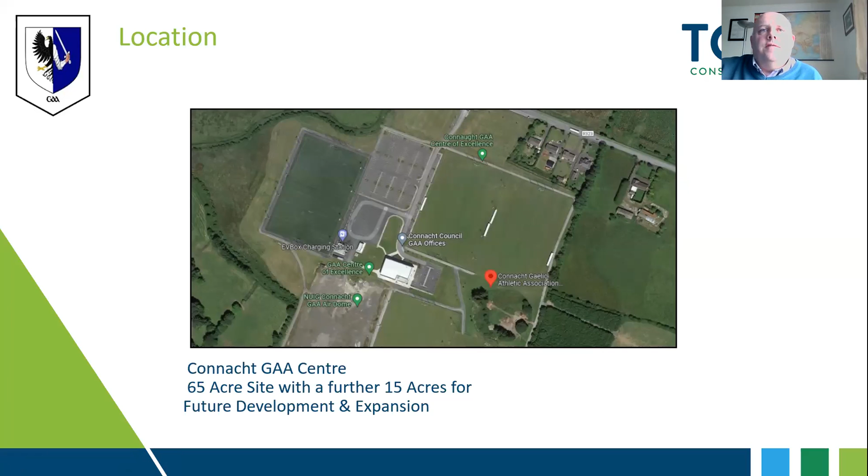This slide shows the existing facilities at the Connacht GAA Centre of Excellence. The centre was developed in 3 phases. The first phase was the external playing pitches, which included 6 playing pitches, where 1 was 3G and the other 5 were natural sand.

The second phase of construction was the pavilion building. The third and last phase was the internal training facility, i.e. the dome, which was recently completed in 2020 and opened in 2021.

The Connacht GAA Centre originally opened its pitches in January 2012. The pavilion building followed, being opened in December 2012, and the dome facility opened in December 2021.

The centre is the home of Connacht GAA headquarters. As I said, it has one 3G outdoor synthetic playing pitch and 5 all-weather sand-top playing pitches, 3 of which have floodlights capable of being played at night. The pavilion building includes dressing rooms, a gym, a commercial-scale kitchen, the Connacht offices, a lecture facility, conference facilities, and around the perimeter of the facility there's a perimeter walking track of approximately 2 kilometres.

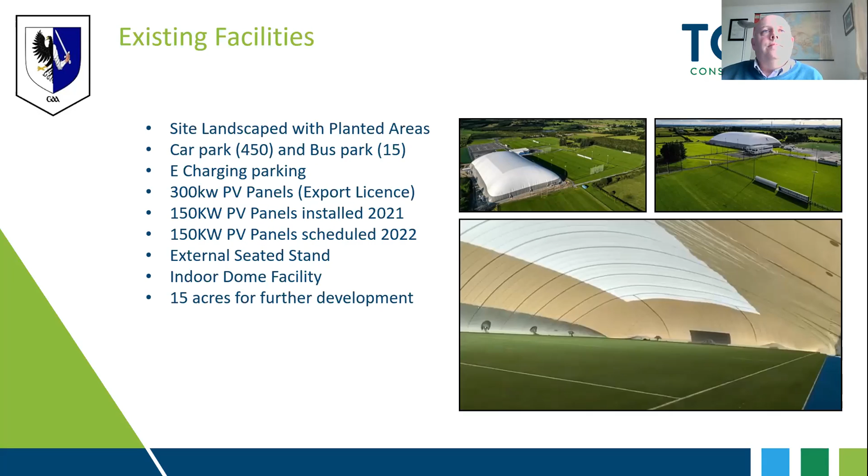So Tobin Consulting Engineers, what was their involvement? Tobin Consulting Engineers was project managers and client reps for the project. We were the civil and structural engineers on site. We did the quantity surveying in relation to planning and statutory requirements. We dealt with the planning applications, the fire cert applications for the clubhouse and the dome, the DAC for the clubhouse and the dome. We controlled and managed the BCAR commencement and completion notices for all the various permissions.

Tobin's project scope for the facility included the initial feasibility, the site selection in relation to the selection of the site, the preliminary design through the planning process. We went on to do the detailed design, and then the project was tendered through the tender process, construction, and ultimately the handover to the client, Connacht GAA.

So now I'll just go into a bit more detail in relation to the NUI Galway Connacht GAA dome. The dome itself measures 150 meters by 100 meters, 150 in length, 100 wide, with a height of 26 meters at the highest point.

It's a double skin fabric structure, and there's approximately 200 mil between the two skins, the inner skin and the outer skin. The dome is fixed to a perimeter ground beam. It's an inverted T, and I'll show you pictures of that later on in the show.

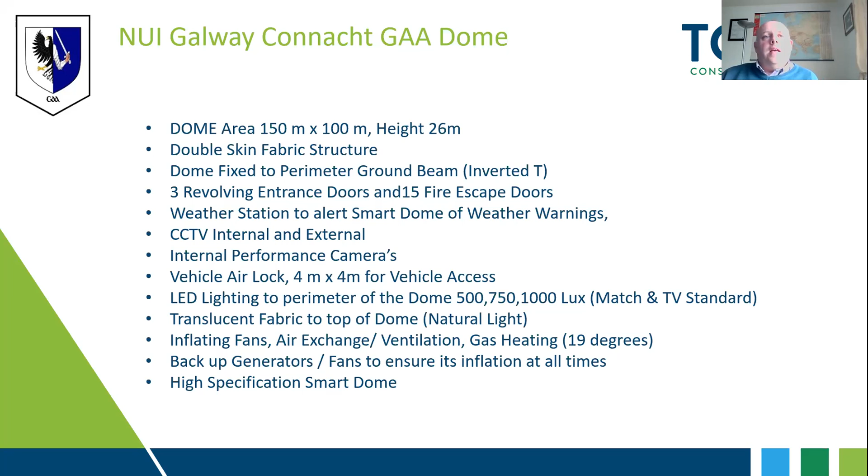As part of the dome, you have the inflating fans, you have an air exchange ventilation system, you have gas heating, which heats the dome up to a temperature of 19 degrees. You have backup generators and fans to ensure the dome is inflated at all times. Therefore, it's a high specification smart dome.

Within the dome itself, it has the following facilities. You have a 4G pitch measuring 130 meters by 80 meters - that's the playing surface. The height above the pitch is 16 meters on the sidelines and 26 meters at the center. The dome curves from its highest point of 26 meters down to virtually a half meter around the perimeter, but it's 16 meters over the playing surface.

The dome itself can accommodate football and hurling. It has a running track training area to one side, measuring 130 meters long and 10 meters, all lined out as part of the synthetic installation - you'll see pictures of that later. You have a gym area at one end of the dome, measuring 40 meters by 5 meters, with a capacity to hold 30 people at any one time.

As mentioned before, you have the performance testing all installed within the dome. You have portable stands internally, currently capable of seating 600 people, and the intention is to increase the number of these mobile stands into the future.

Around the perimeter of the playing surface, you have a 2G surface - you'll see in the pictures later, it's a blue surface. This is the concourse perimeter, so this is whereby people can easily walk. It's a flatter, smoother surface, 2G surface. The dome has a capacity of 5,000 up to 10,000. Our fire cert secured for the site from Mayo County Council allows 10,000 occupancy.

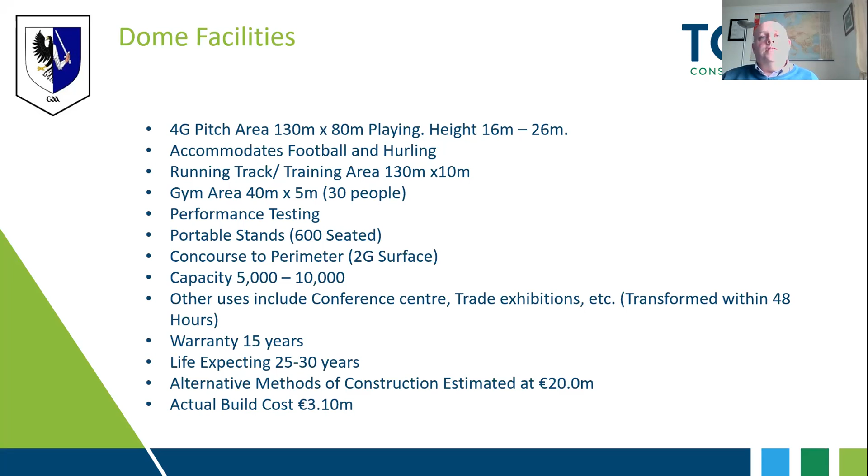Now we move on to the dome program. We secured planning permission for the dome itself back in 2017. We secured funding in 2018, which helped us progress to detailed design, started in January 2019. We went on to tender stage July 2019, and commenced work on site October 2019.

It's normally a 7-month contract, but due to COVID, delay in delivering materials and site closing, it took quite a bit longer. The work was complete in October 2020, which was 12 months - not a big increase considering the obstacles we had to go through.

The dome itself was officially opened in December 2021 by President of the GAA, Larry McCarthy, and the first indoor competition game was played on it, the FBD League, in January 2022, Leitrim versus Sligo.

In relation to the dome team that was involved, the client itself was Connacht GAA. Project managers was Tobin Consulting Engineers. The main contractor that won the contract for the dome was Prunty Contracts Limited. The dome specialist under Prunty Contracts was DBS, Salvini and Company, and the pitch specialist, a Sligo-based firm, SIS.

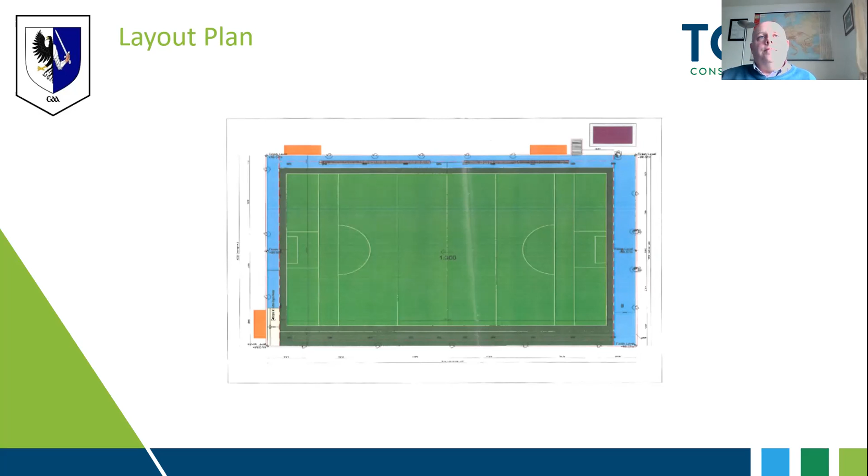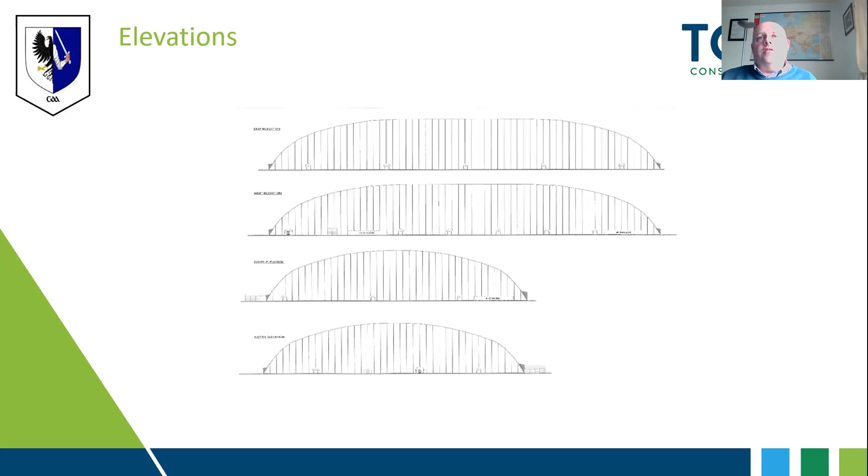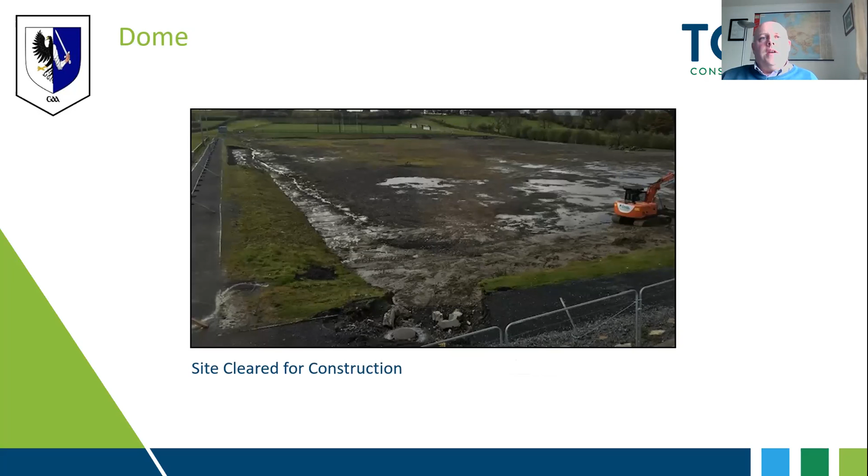There's a few snaps here now in relation to the construction. This is the first site when we started on site. The weather was quite bad back in October 2019, so this was just the site being cleared for construction.

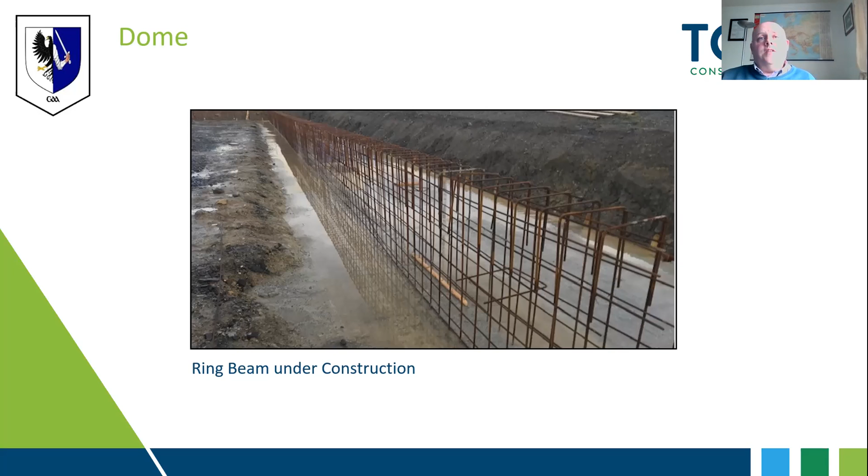I've mentioned before that there was a perimeter beam around the dome, whereby the dome itself is fixed down to this beam. This is the inverted T beam, which runs right around the dome, its overall length being 0.5 kilometer, 500 meters, all 4 sides of the dome. That base is approximately 4 meters wide, 0.5 meter thick, and the upstand is approximately 2 meters high, 0.5 meter wide, and that upstand projects above the ground by approximately 0.5 meter. I'll explain on the next slide the reason for this.

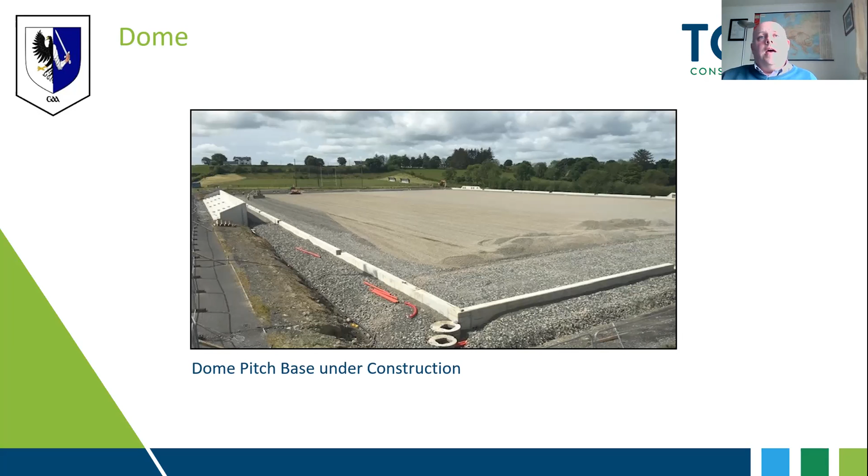This is the dome pitch base under construction. The final layer of screenings has been laid, and they're getting ready for the carpet to be installed. Around the dome, outside the T-beam, there is a 4 meter pathway, which allows access around the dome for maintenance during its lifetime.

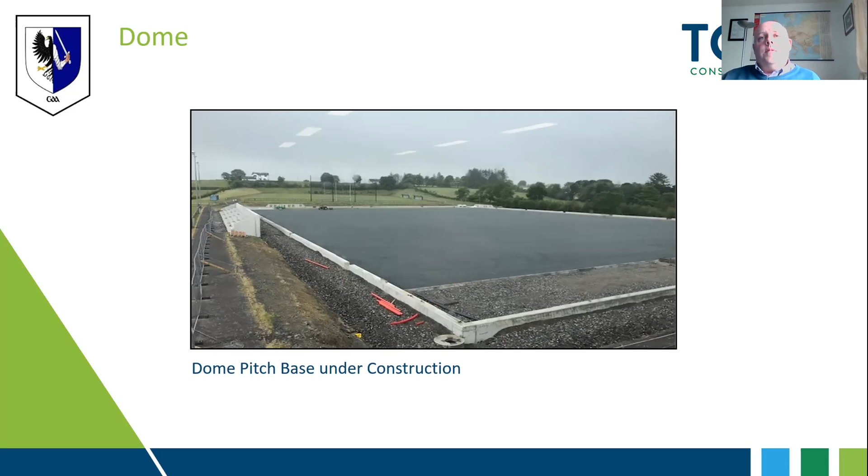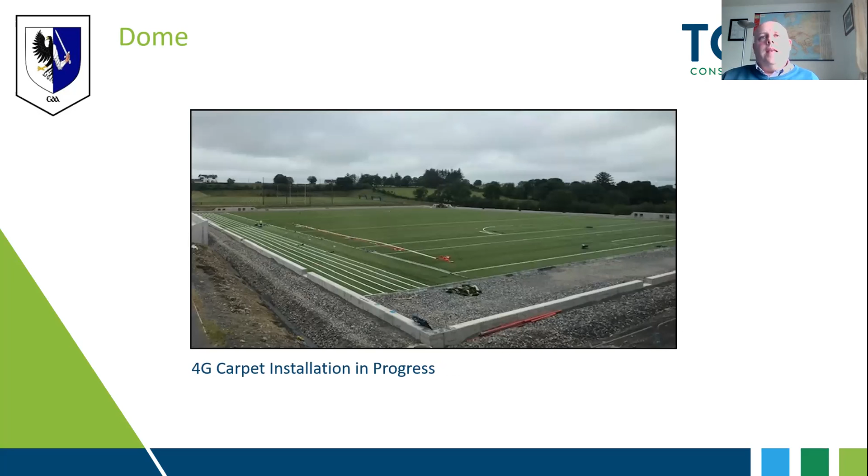In this slide, the 4G carpet installation is in progress. You can see the running track to the left-hand side, with the lines laid out, and the pitch itself. It's a carpet with a 60 mil pile, and it comes with all the lines in place. It comes in rolls, which are laid out, lined up, and stitched on site.

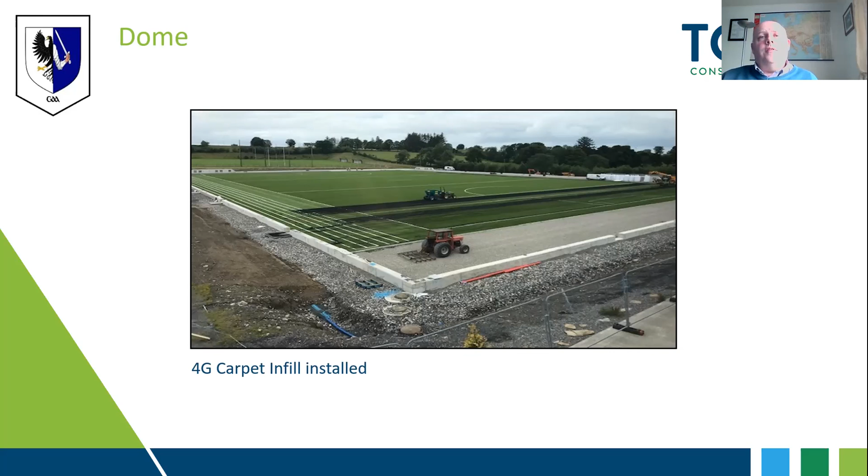As I said, there's a 60 mil pile in the carpet, and into that pile you have to install infill, a combination of rubber and sand. In this slide, you can see the rubber being installed by tractors and hoppers, then spread on the carpet, and brushed in using brushes.

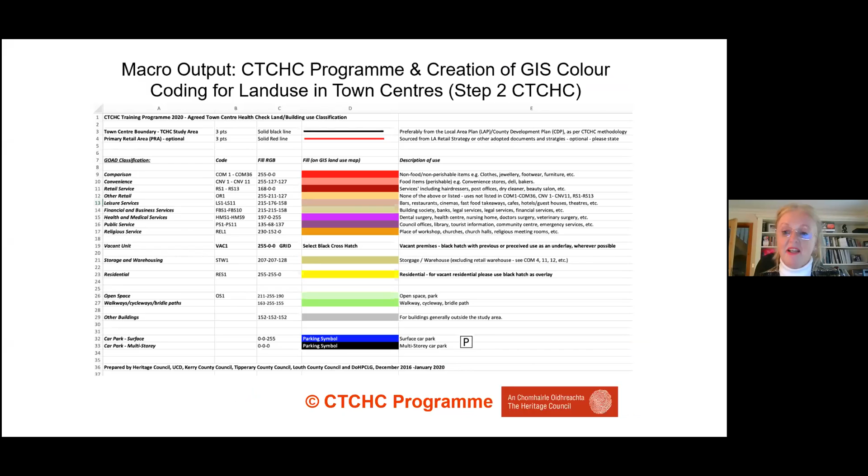So we're just waiting for the programme for government really at this stage. The Town Centre First that we advocated for was released in February 2022, but there really needs to be a push on now to help these towns.

In terms of systemic problems and data gaps, the beauty of the programme is that we've been able to shine a light on what is not working. So the data gaps really are very clear, this is sort of cumulative gaps. There's not enough data on land use, floor space, vacancy, building condition, just so important.

And we obviously want to work with the engineers on that, looking at the heritage, cultural significance, and who actually owns the building. So there's a rich tapestry in our town centres.

What we actually find is maybe some in the larger towns in particular that the ground floor is owned by one owner and the upper floors are actually owned by somebody else. So it's very, very complex, but that's the challenging thing about what we're trying to do.

So the 15-step process, we've got land use surveys, that is only one step. We've got footfall, business surveys, consumer surveys, ownership maps, car parking, accessibility. It's just trying to collect all that information, all that data and bring it all together.

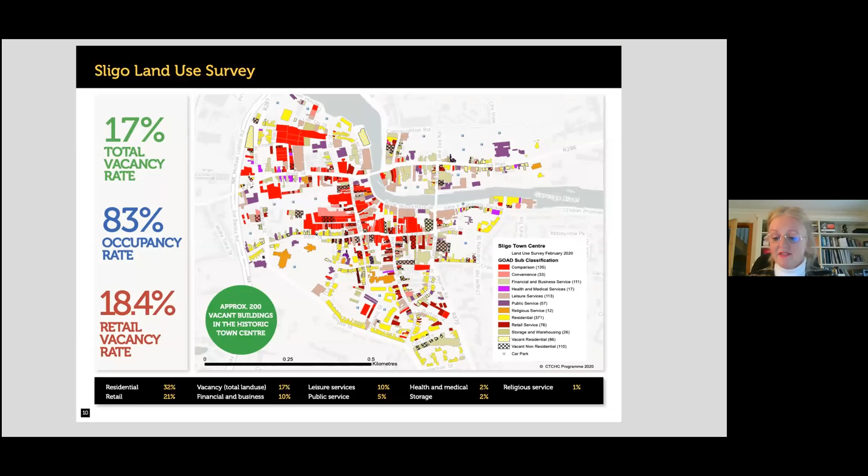So yeah, we really have a lot of work to do. Everything is very visual, as I say. One of the things we found out about Sligo was that even before COVID and lockdown, a lot of people were shopping online. So it's just trying to get that data, that intel, as they say.

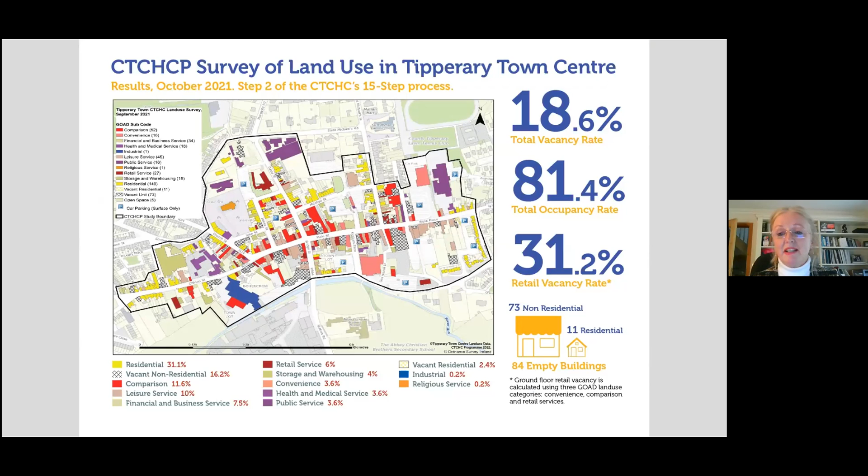I tell them it's a wee bit like a football league, but you've got to do something. Once your vacancy level goes above 11%, and a lot of our towns are way above 11%, in terms of pathway for funding, there's a lot of funds out there, different departments.

Really what we need for Town Centre First is for this to be pulled together. We've got towns less than 10,000 population in the Department of Rural Community Development, and we've got towns above 10,000 population in the Department of Housing.

So just to show an example, Tralee, the journey that they've been on. We started in 2016, met up, did the first workshop, then started doing the work with IT Tralee, Chamber Alliance, and also Kerry County Council. We launched that, I think it was August 2017, and then a few months later, in November, they won Most Enterprising Town Award.

And then they started to get into their stride to get the funding. So the HTI, we gave them money from the Heritage Council, and then obviously the URDF. So there's a lot to be done for our towns.

TCF is only really the very first step. Support is needed, we have a massive waiting list. We need to set up Ireland's Towns Partnership, the Scottish have had this for many years, we don't have this. We need to look at CPO and how do we make it more efficient and how do we make it work properly. Compulsory sale orders, other countries are doing this.

Also, town centre BIDs, business improvement districts - we only have 3 in Ireland, while Scotland has 40. So we're a wee bit slow in the uptake there. Community development trusts, conservation area regeneration schemes, heritage action zones - there's just so much we could do, so much potential. And then also we need digital dashboards.

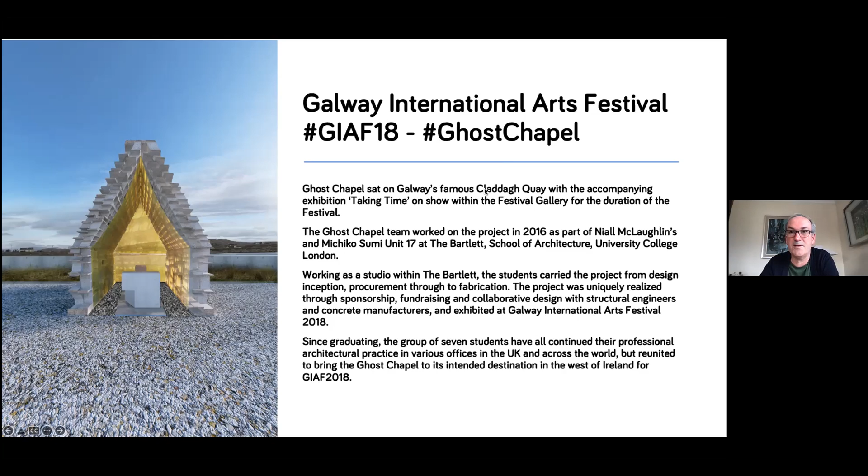Oops, sorry, my slideshow has gone - there we go. This is the team of students. Perhaps some of them are watching this evening, as they were aware that this talk was going ahead.

And if you wish to learn more about the unit, you can find it at the web address there at the bottom of the screen.

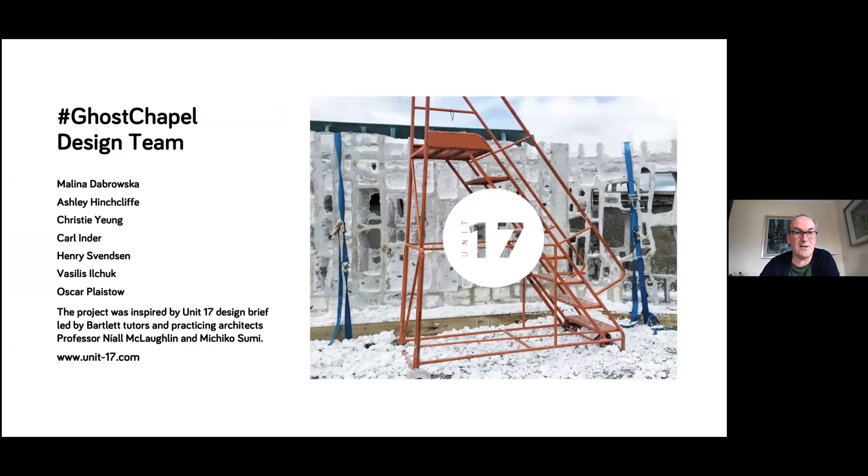It was quite an undertaking with a lot of expertise required, and you can see some of the processes and the construction in later slides, so we'll get to that in a minute.

Also shortlisted in 2015 for a social housing project in Whitechapel in London, and in 2013 for the Bishop Edward King Chapel at a theological college near Oxford. So one of the most preeminent and accomplished Irish architects this country has ever produced - a kind of reference, I suppose, to what Ali mentioned earlier about our diaspora and the influence that's had globally in raising the reputation of architecture and engineering around the world.

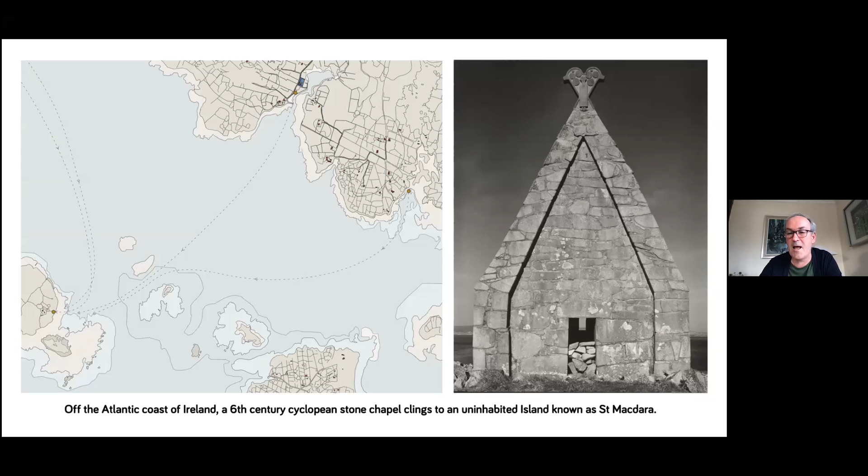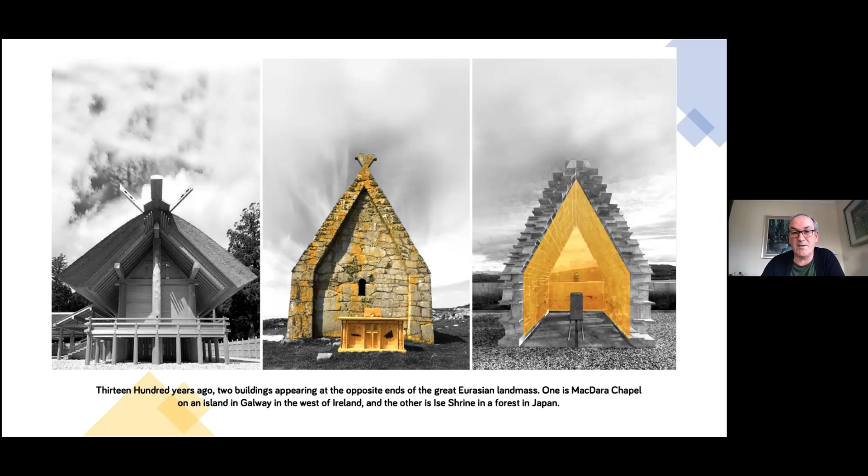I've got a little video here which I'm going to allow Niall to talk a little bit about the connection between the Ise Shrine in Japan and the MacDara Chapel, and how that led to the idea of creating the Ghost Chapel. I'll just play this for a couple of minutes.

Sorry, I'm just going to stop that for a second and reset it. 16th of July for the blessing of the boats. Some years they can't get onto it. There's an issue there with the video.

MacDara's Chapel, as I mentioned, is a 6th century chapel on the island of MacDara off the coast of Connacht. On the 16th of July every year, hundreds of people make a pilgrimage to the uninhabited island of St. MacDara's for a celebration of Mass and the blessing of the boats. St. MacDara was the patron saint of local sailors and is believed to have built this small church on the island in the 6th century.

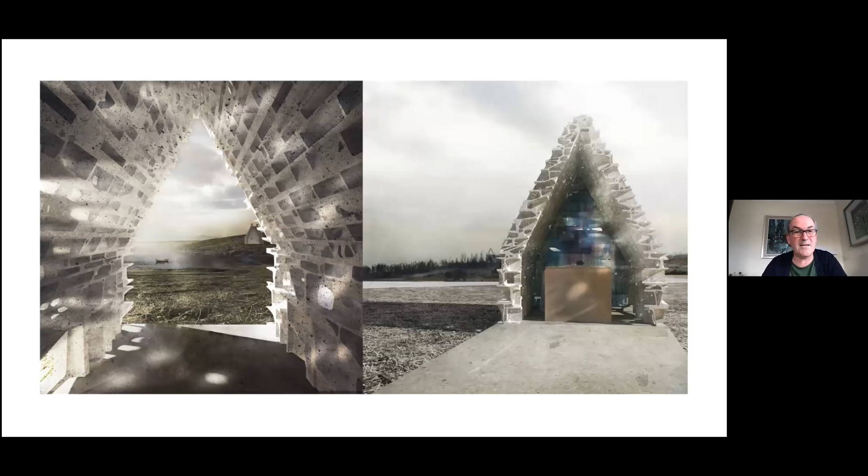So as a housing really for the Mass to happen, not only did students think about designing a suppose replica chapel, but also a space for an altar and the backdrop for that as well. Here's some renderings of the chapel and its relationship, echoing the existing chapel on the island beyond.

So constructing a ghost, how are we going to go about that? First of all, the Bartlett School of Architecture is one of the top architecture schools globally, I think in the top 3 in the world. They have amazing facilities, robotic facilities, and a team came from the Bartlett and scanned the existing structure to produce these drawings.

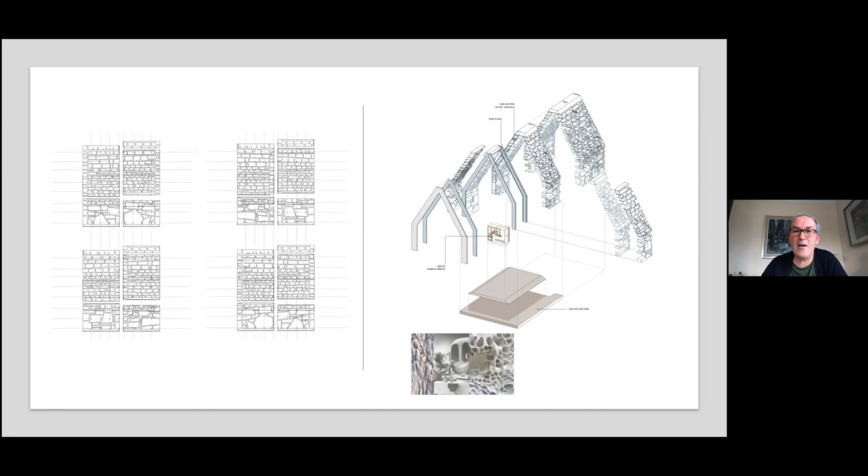Detailed drawings of the stone structure of the chapel, which then they could actually model how they might recreate the chapel.

Now the project was about creating a sort of structural negative. It was about the spaces and gaps between the stones and the mortar between the stones, rather than the stones themselves. So the drawings were then set out onto a massive laser cutter robotic machine, where they used insulation foam to cut out the shapes of the stones, and you see some of that process here.

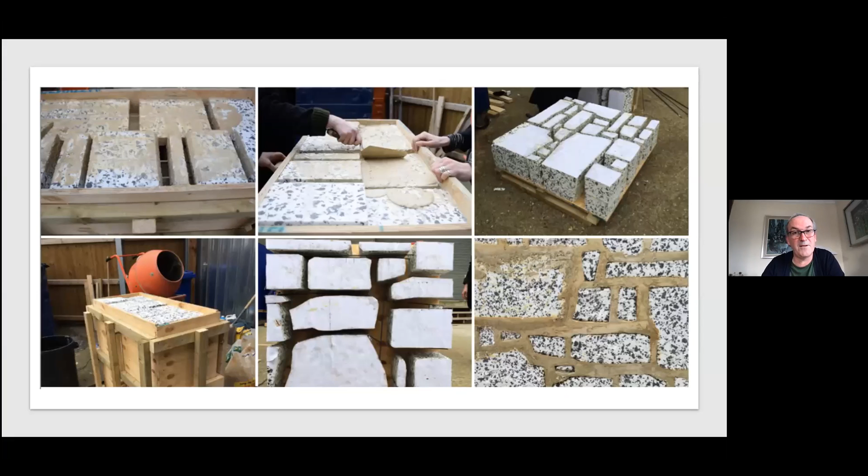So they did a lot of prototyping of the different types of materials that they might use to fill the gaps between the actual cutouts, which you can see in some of the images here. Some of the prototyping processes where the students tested the ideas at the Bartlett facilities in London.

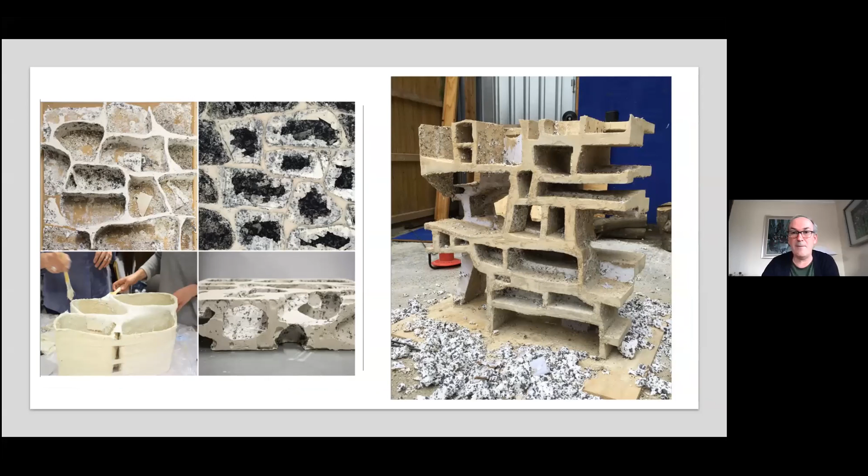So a glass reinforced concrete was the final material choice. And you see here then the robotically cut out foam insulation stones attached to the formwork, where they were eventually going to cast the glass reinforced concrete within that.

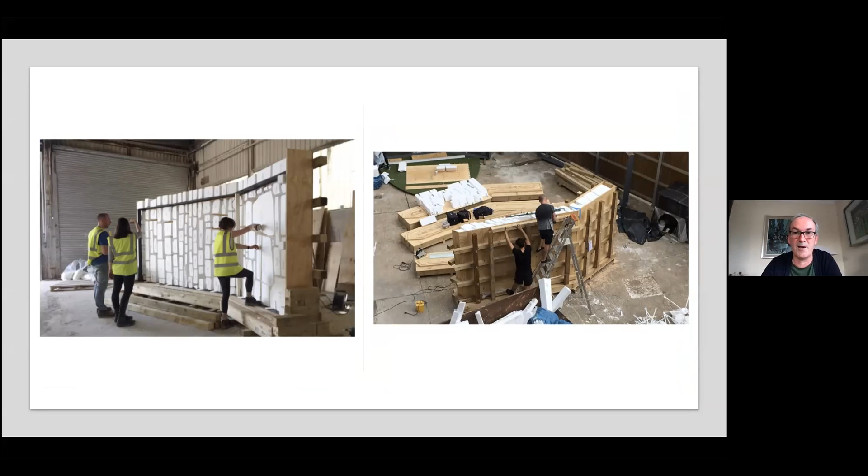Some of the students working here just attaching that to the panels for the casting. Some details here of the stones, of course all numbered, as you would if you were recreating a chapel from one location and bringing it to another, with the same sort of techniques employed.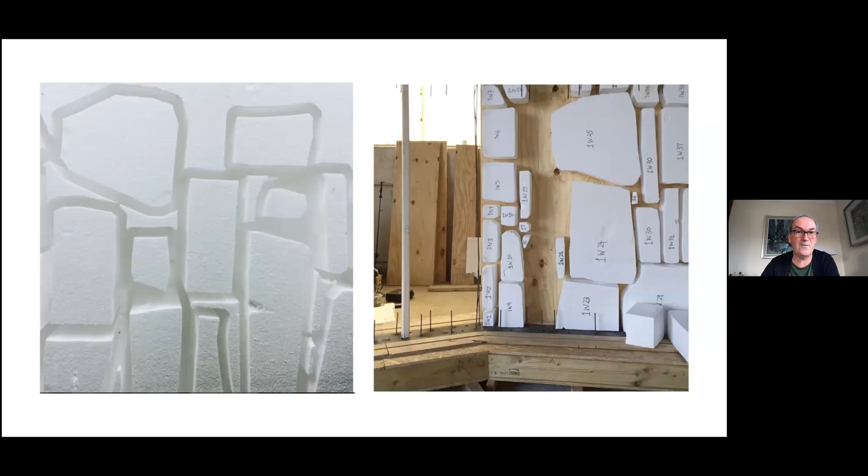Exact mapping of the stone construction, and then recreating that in insulation board and attaching that to the boards for the formwork. Another picture here of all the stones attached, then encased within the hoarding for the formwork, with steel elements to actually hold the whole thing together.

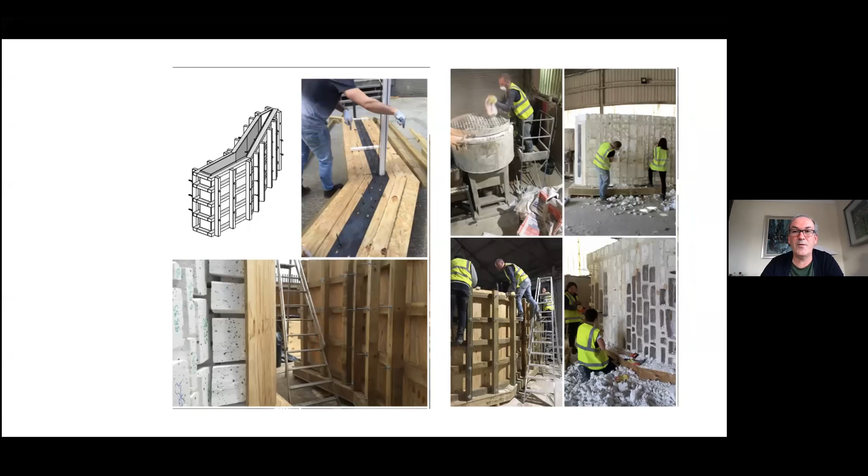Here are some more images of the whole process. Once it was cast, they had to remove all the foam board insulation, which they had to dig out. It was a very laborious process.

Here's some of the team of students we saw listed earlier in the presentation, pouring the glass reinforced concrete down into the formwork on the left. This picture really illustrates what the process entails.

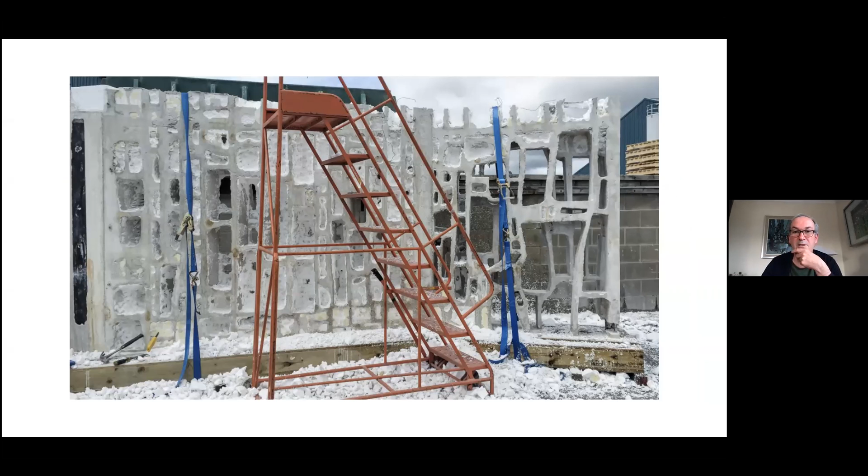Once the foam had to be removed, and the hoarding, the formwork, was taken down, they then removed all the insulation material from between the concrete, and you see here this filigree structure that's left behind. So this is the result.

It was actually 4 different sections, weighing a total of approaching about 10 tons. It's an inverted form of the existing chapel, scaled down and absent of stone, leaving only the mortar to form the structure, with the elemental notion of simplicity as applied to the architecture of Macdara's chapel.

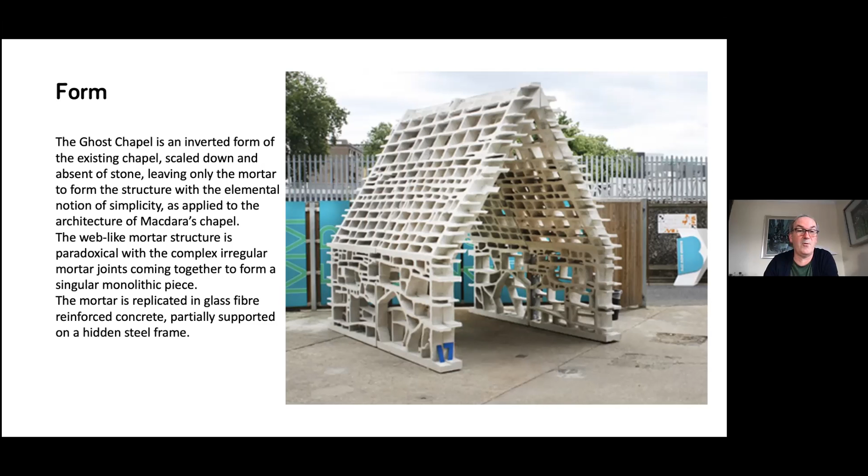The web-like mortar structure is paradoxically, with complex irregular mortar joints, brought together to form a singular monolithic piece. The mortar is replicated in glass fiber reinforced concrete, partially supported on a hidden steel frame.

Some details here - on the right-hand side of the picture you can see just how the structure was bolted together by the steel plates. So, like I say, 4 different individual parts.

This was erected at the back of Euston Station on a plot at the former site of the Bartlett College in London, before they moved to their new premises. It was only on exhibit for a very short time when I saw it in 2016.

The building was set for demolition, so the actual chapel itself would have ended up being demolished, but it was rescued by the generous support of Galway International Arts Festival, just a week before it would have been lost forever.

They saw the potential in this project and the connection between this sense of place that people have here, and the poetic language in the work itself, and how that might be of interest to people here in the west of Ireland.

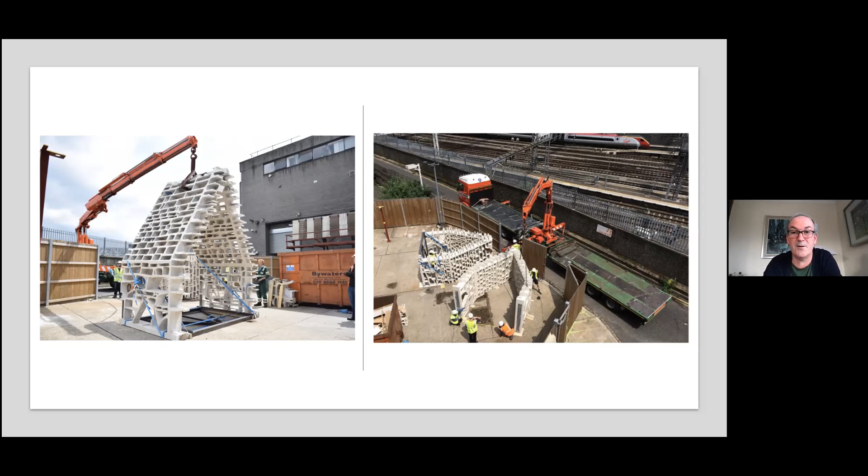So it was loaded up onto a flatbed truck, and you see here two of the different sections on the back of the truck, and the other two sections being loaded. I actually think I see Niall and some of the students there in the picture, preparing and working it out.

It's a fragile enough and very heavy structure, so quite a tricky operation. This was then being brought off to Galway.

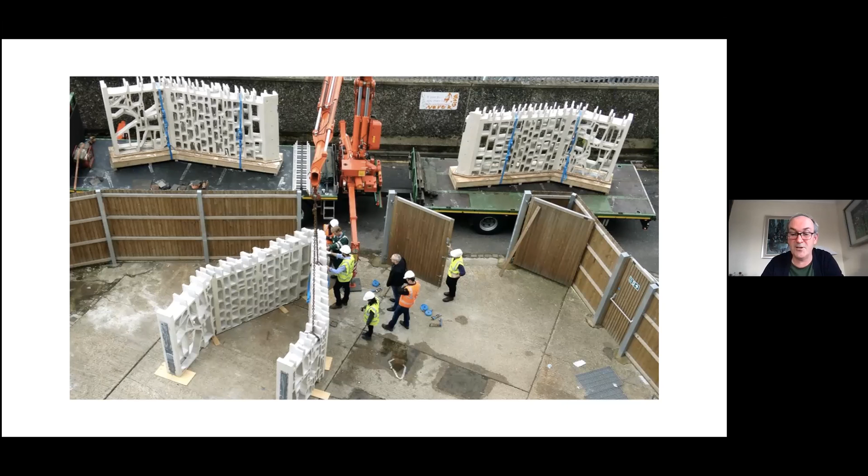So the students came to Galway, the same student team, and curated the exhibition and installed some information posts along the Claddagh quay, which led to the chapel located at the end there.

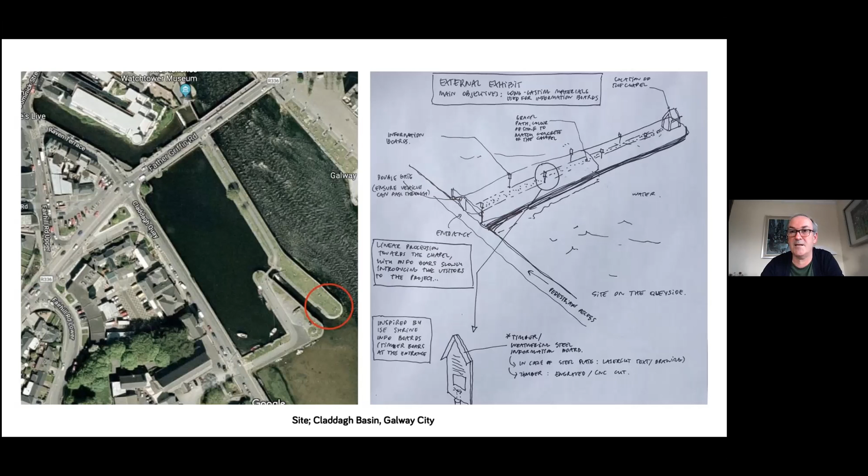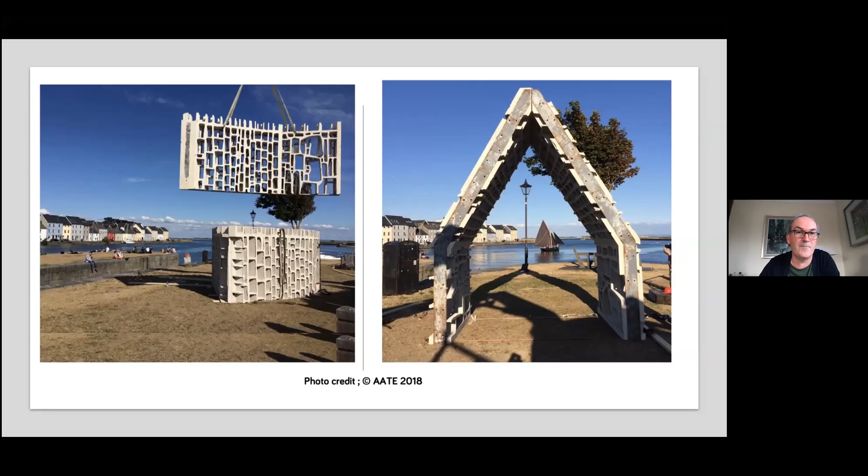There's a small video here, again I'm almost afraid to play it, of the chapel that was taken just early one morning. I suppose it's the sense of the ghost-like quality of it as it is in play, but we'll give it a shot - hopefully you get a sense of what the project looked like.

This was taken at a time-lapse motion camera. What was interesting was we created a bed of stones underneath the chapel, just as a footing, I suppose, because it just sat on the grass.

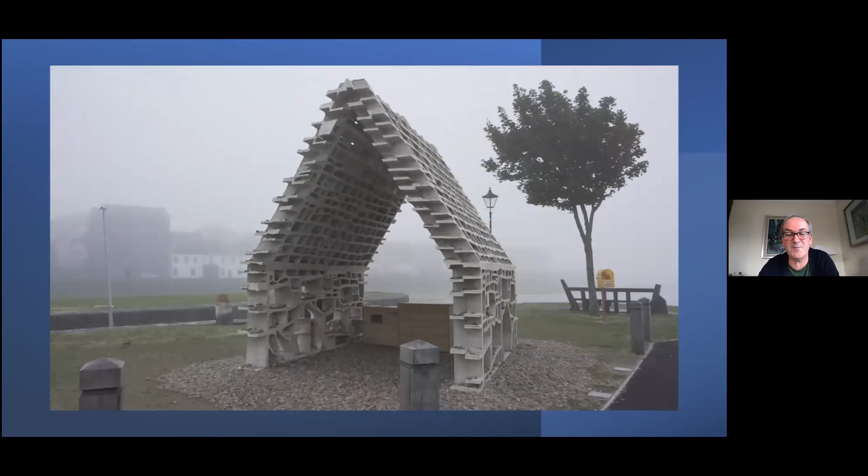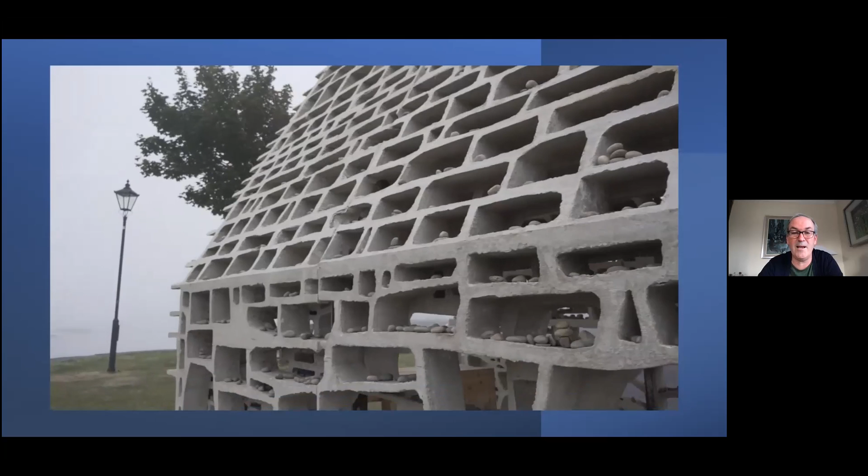What was interesting was the way people interacted with the chapel. They all picked up some of these stones and placed them within the voids, into the spaces, and onto the lips and shells of the structure itself. This wasn't the intention, it was just accidentally what people did, especially young children. You see a child of the cameraman doing this, and it was a beautiful way that people interacted with it—a bit like when people climb a mountain, or go to a chapel on pilgrimage and bring a stone to leave at the peak, or on the altar of an old chapel.

It wasn't intended. We didn't invite people to do this. They just did it themselves. It was just a wonderful, magical thing that happened.

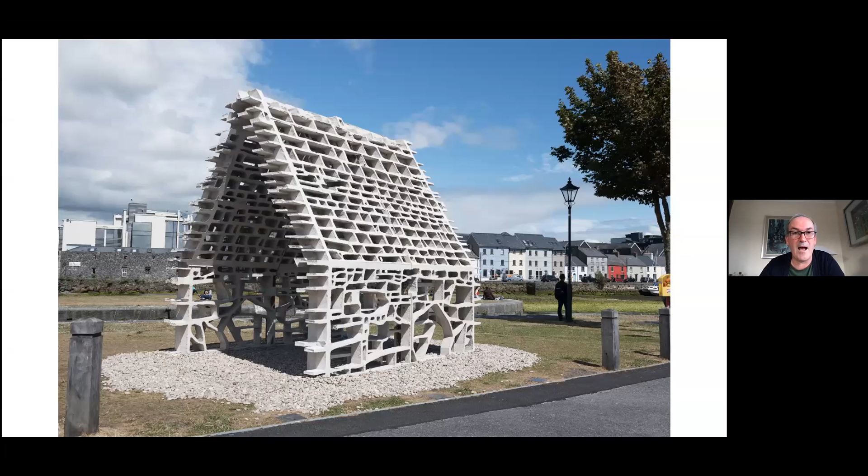Just a few pictures of the chapel as it was installed for the Galway International Arts Festival for two weeks, and it was an absolute triumph. Thousands of people came to see it and also to visit the exhibition at the festival gallery, which showed the construction processes. Niall McLaughlin himself and Mishko came to deliver a talk to an audience about the project.

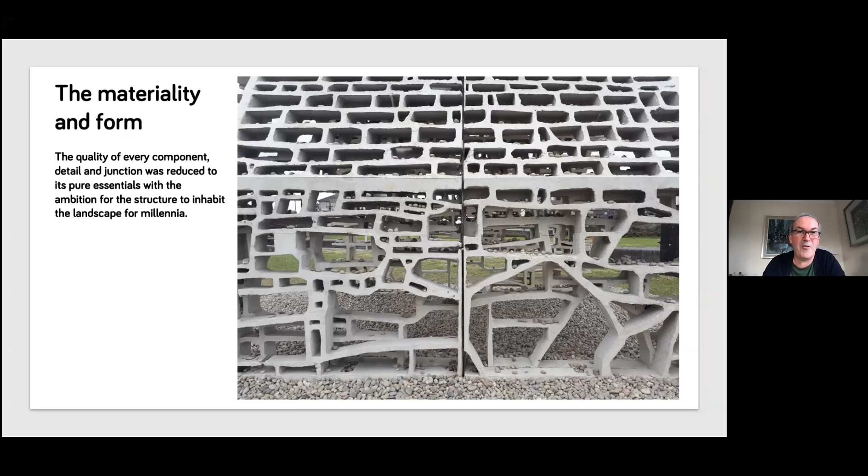If you search the hashtag Ghost Chapel, you'll see hundreds of pictures people took of the chapel during its time installed on the Claddagh Quay, and I'd encourage you to go and do that. A really good shot here of the materiality and form of it. The components and detail of the junction were reduced to their pure essentials, with the ambition that the structure inhabit the landscape for millennia.

Since then, it's sadly been in storage for the last four years at a warehouse in Moycullen, but the original intention was that following the festival it would continue its pilgrimage to a location in Connemara, finally settling on the coastline near Ard, near Carna, to become a new marker in the landscape and connect to the original chapel across the water on the island of St. Macdara, so that it could be used for occasions where the weather didn't allow for mass on the island. It's still hoped that might be possible.

The project wouldn't have happened without the generous support of all these people. I think the estimated associated cost would have been about £20,000 sterling, and that didn't include the curation and project support that came from Galway International Arts Festival to see it installed in the Claddagh.

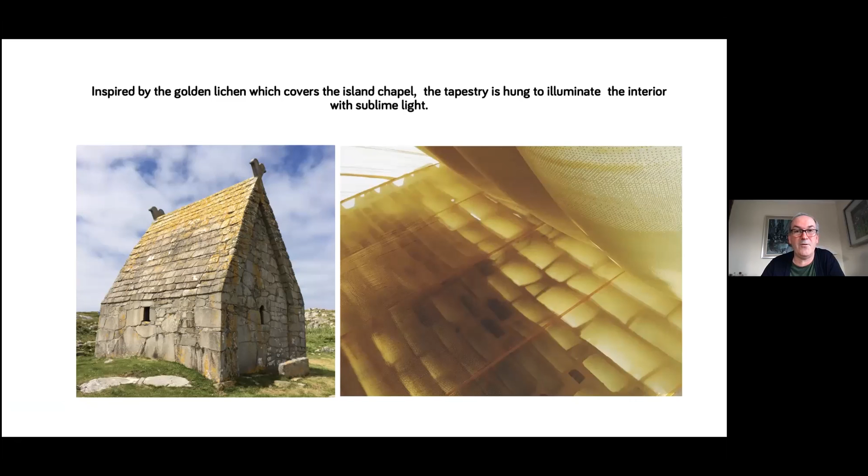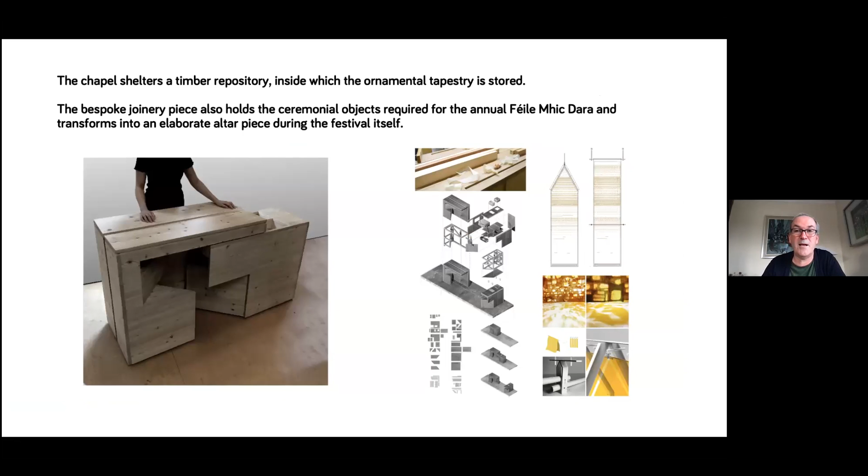Some details here of the large altar they created, within which the tapestry would be stored, and then brought out again on the boat for the Féile Mhic Dara and for the festival itself. And here's an illustration showing how the tapestry could be stored within the altar piece, along with some student work on that.

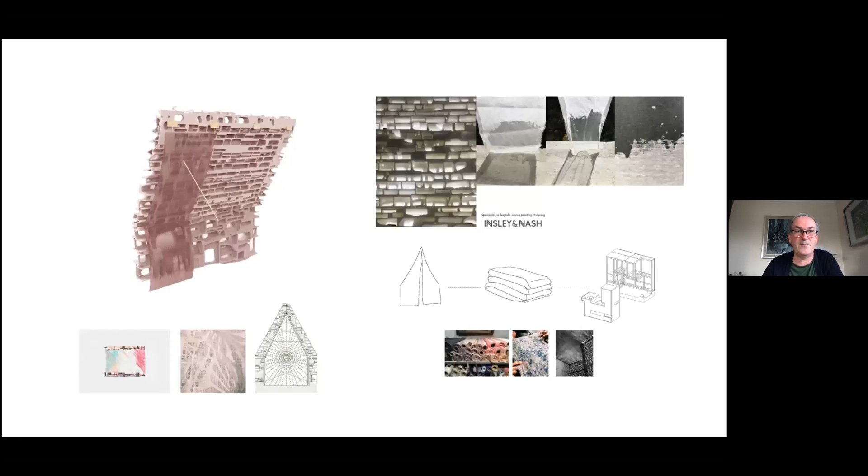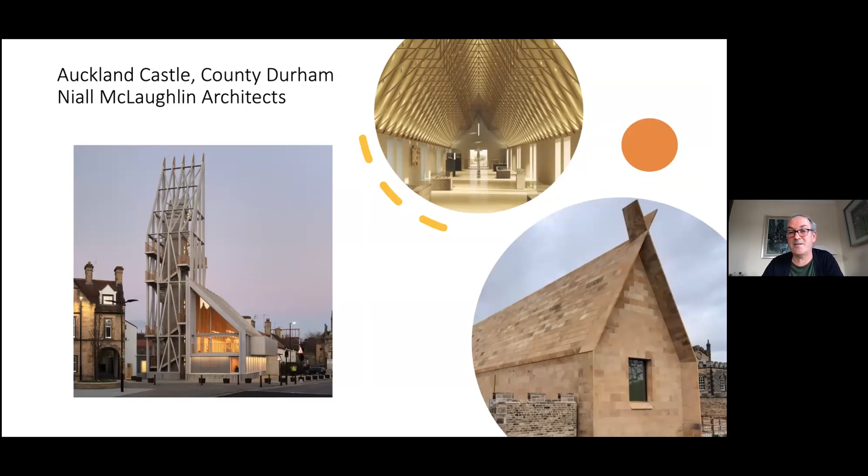There's a really lovely picture of it installed at the back of the Bartlett for the exhibition in 2016, and linking back to Niall McLaughlin's practice—a recent project he's been working on, the Auckland Castle project in County Durham—you see here a reference to the Macdara Chapel within Niall McLaughlin's own work as well.

I want to say thank you to everyone at the Bartlett School of Architecture, particularly the students of Unit 17 from 2016, Niall McLaughlin Architects, Michiko Sumi, Galway International Arts Festival, and our funders, the Arts Council, for making the project possible. And that is the end of my presentation. Thank you very much.

Thank you very much, Frank. Very inspiring project, and I loved what was shown in the video of Niall talking about concepts of time embedded in buildings. Really, really nice phrase.